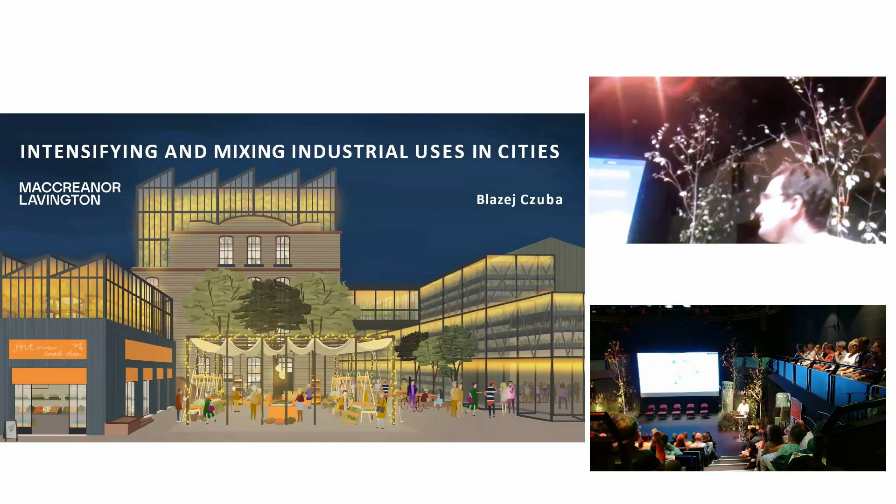You may think of Maccreanor Lavington as housing designers, and, well, not only housing designers, but we have built thousands of homes, largely in London, but mostly in cities in the last 20 years. All of them have been built on brownfield sites, and it's fair to say that brownfield is not a field. A lot of that has had an alternative use. A lot of that in cities was formerly industrial.

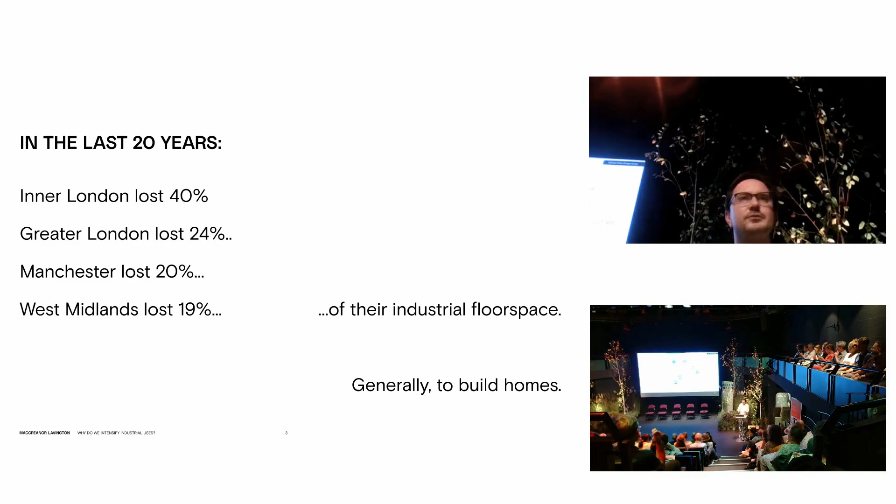The consequence of this is that in the last 20 years, Inner London lost 40%, Greater London lost 24%, Manchester lost 20% of the industrial floor space. As a consequence of a huge amount of industrial floor space being lost in the last 20 years, there has been a lot of pressure on the industrial land. Land values have increased, but also the square meter costs have increased for the individual businesses. So the businesses have had to adapt substantially. They have shrunk, they have fewer floor space requirements, and digitization, automation have also impacted that quite a lot.

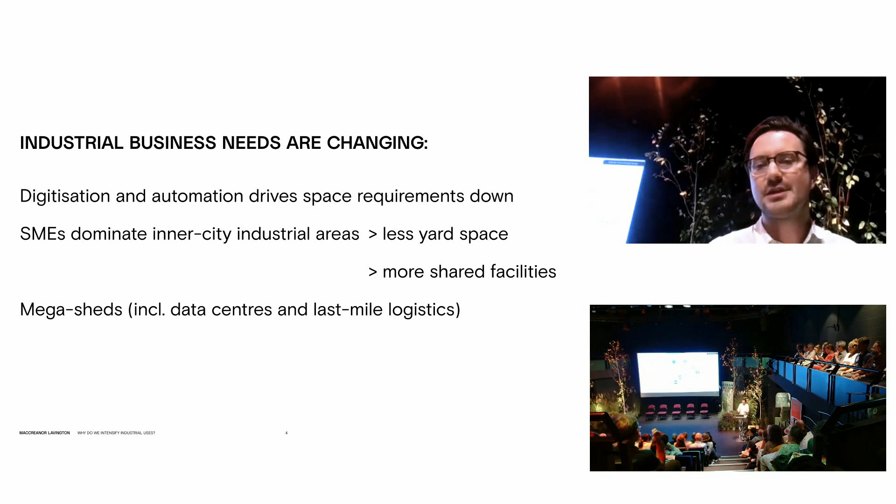But the ecology of particularly inner city industrial areas has dramatically changed. They don't need massive yard spaces, they don't need lots of operational space, but they do need more shared facilities, and actually they do need to be in locations that have amenities and have different qualities. The reality is that all of this has also coincided with the creation of a typology of mega sheds that hold data centers, last mile logistics, the kind of buildings that dwarf the Edwardian mills or granaries of Liverpool and the likes.

And altogether, that has led to quite a substantial change in the actual ecology of industrial land, where general manufacturing, distribution, all those things, they do coexist with plenty other uses, including film studios, but also including policy or not policy compliant yoga studios, gyms, churches, maker spaces. So there's a huge, very complex, very fragile ecology. Ecology that is undergoing a huge amount of pressure because of all of the things that are happening around it and the fact that businesses are desperate for space and that space is continuously shrinking by virtue of more and more developers wanting to build on industrial land.

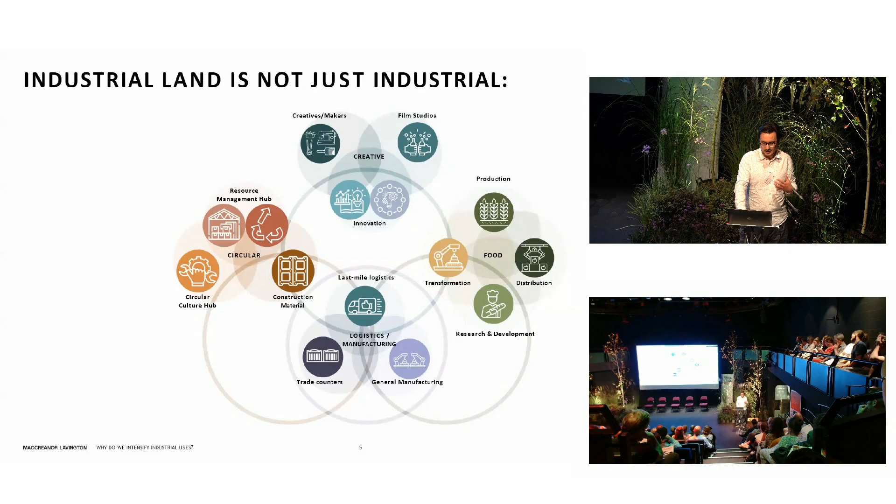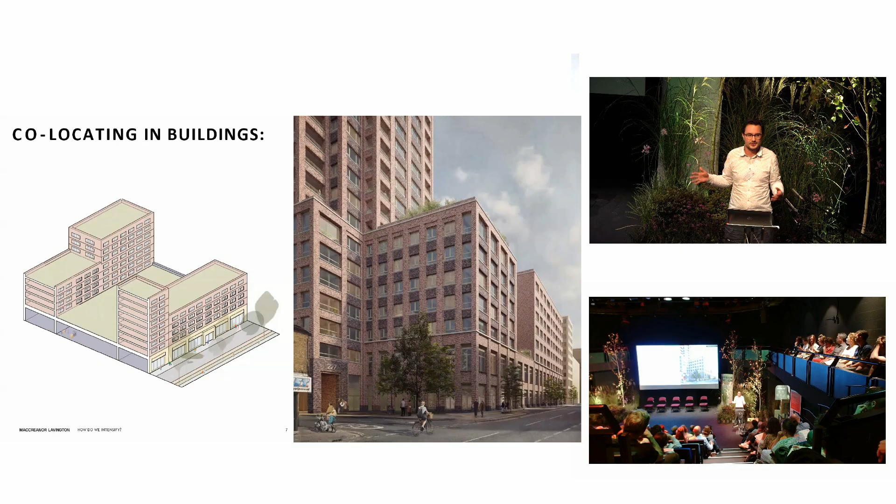The reason for this is that if any of you has ever lived right next to an MOT garage or an Amazon distribution center, it's not fun. They're not very good neighbors, and they're quite aware of that. So they will not want residential neighbors right next to them because there may be 1 or 2 complaints. So the reality is we're yet to see how successful this building is, but we know that it is not necessarily going to be the distribution yards that originally it was intended to. It's going to be something very different. But then there's a massive question of how do you accommodate the kind of industrial uses that the entirety of every city absolutely depends on. We do want our Amazon and we do want our Ocado being delivered on time.

So a lot of the business development work has moved away from what is called horizontal co-location to vertical co-location, which effectively means stacking, which is a fantastic way of effectively multiplying the amount of floor space you have available. But it comes at an enormous financial cost, enormous embodied carbon cost, and quite a substantial operational carbon cost. It can often enough demand a massive ramp that takes HGVs up to a different level. Equally, as with this example, it can operate on the basis of goods lifts, but again, not every single business is willing to accept that. And it costs quite a bit of money.

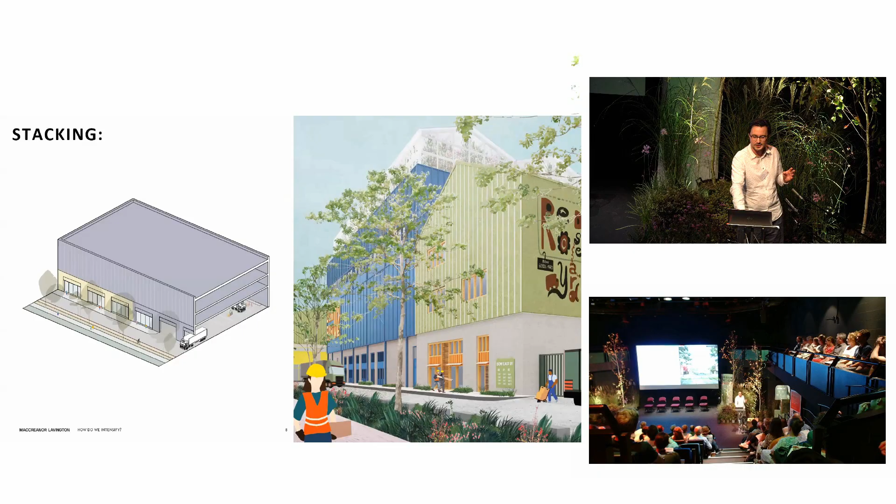So if 5 years ago something like this was perfectly viable and developers were desperate to build more and more of those across London, they don't do it these days. They probably will do it in 5 years' time. But as is often the case, challenges of viability and austerity lead to looking at the tried and tested and changing that quite substantially. So there's a huge amount of work that can be done to the kind of standard single-story shed that you see all around Slough, Hemel Hempstead and the likes, by making that work a little bit harder, by optimizing the yards, putting mezzanines above spaces that you can put above them, trying to get rid of any space left over after planning.

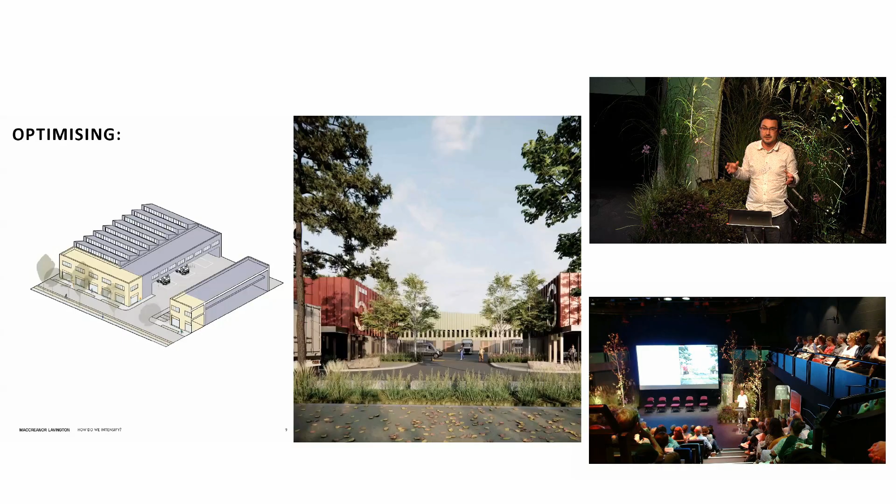It just so happens that there's a huge amount of space left after planning in any industrial estate, because that land often enough is cheap enough to do it, and there's a perception in the industry that an industrial shed has to be an industrial shed, and there's zero capacity for change in the formula. Well, we ourselves don't believe in that.

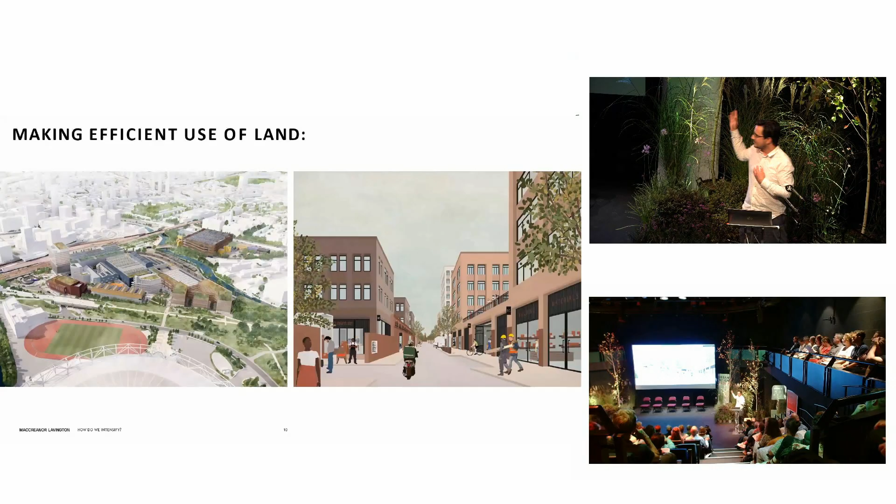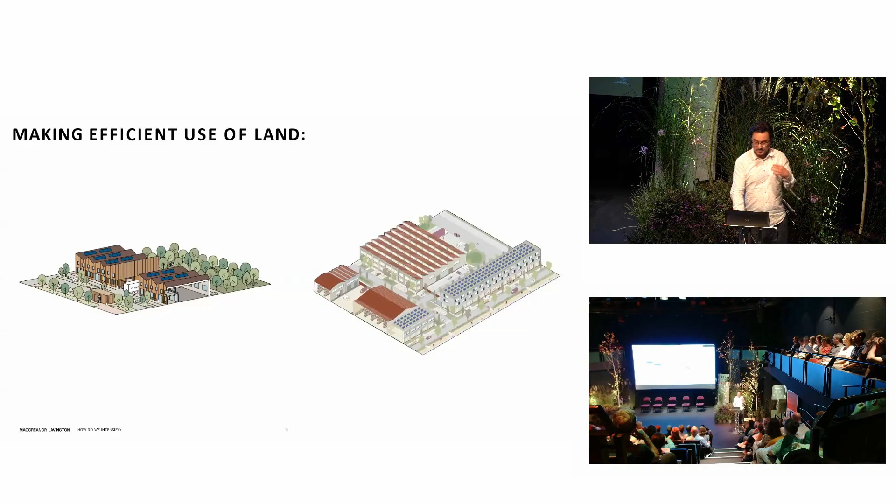We believe that you can make an efficient use of land within an industrial area. You can do it in a city, so you can do it in pretty much central London. You can do it in Inner Birkenhead, but equally you can apply a very similar approach and very similar ethos to, let's say, rural Sussex or the outskirts somewhere out in the Wirral. Fundamentally, it comes down to an ethos which is of not looking at an industrial estate, but seeing an industrial area as a piece of a city.

And as a case study, I want to talk about Bow Goods Yard, which is a project that we have spent the last couple of years working on for Network Rail in London. It may not seem that way, but it is a critical use to London. It is one of the few remaining railheads in inner London. It brings in about a dozen trains every day that carry aggregates, carry construction materials. They take construction spoil away from inner London to areas that perhaps we shouldn't take them to, but they do.

It does have a couple of concrete batching plants that are the most valuable piece of concrete batching real estate in the world, largely because the City of London depends on these two concrete batching plants, because they are the closest you can get to the City of London.

The challenge is that Bow Goods Yard also happens to sit right in the middle of the country's largest regeneration project. We have a beautiful view of the London Stadium from one of those aggregate heaps. We can see UCL East, we can see Stratford Waterfront, and on all sides we're surrounded by either existing or future residential communities. How the hell can you be asking anybody to build 1 million square feet of industrial floor space, intensifying the heavy industrial use and bringing in more trains to this site?

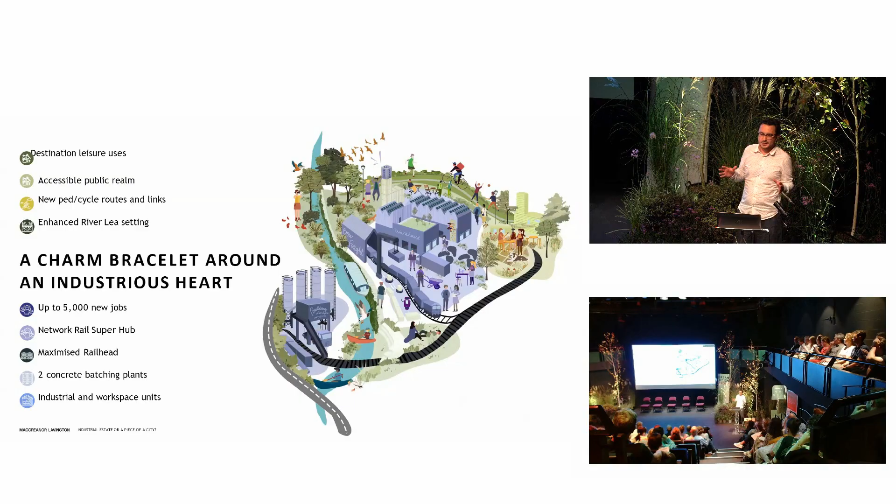The approach we've taken has been around offering something to the community before talking about what happens inside it. So we've developed a vision of a charm bracelet, which is offering uses and offering the spaces for the communities. The reality of industrial areas is that there's plenty of other uses in there that nobody talks about that are very comfortable together. Destination leisure uses, something that cities very much need, but the kind of uses that are not comfortable sitting next to residential uses, but they can be very comfortable sitting next to the kind of industrial use that will benefit from a 24/7 economy and from the footfall, if not directly next to it.

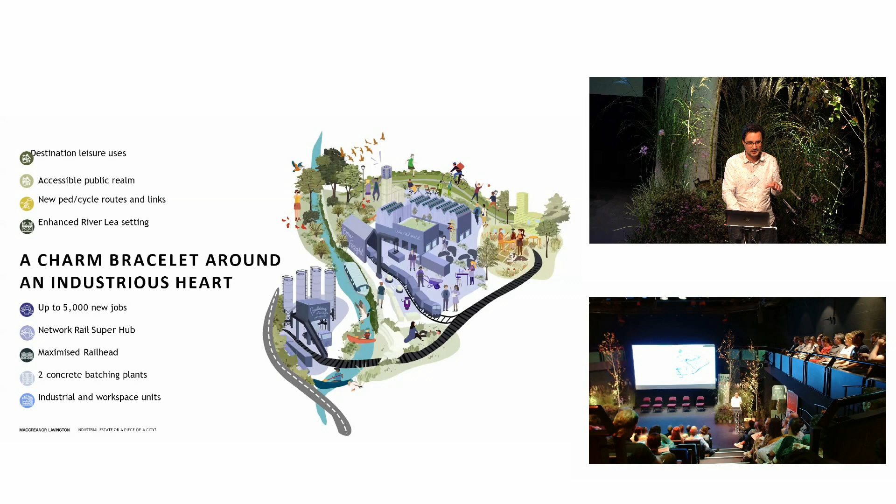And we've looked at plenty of public realm improvements, improving the pedestrian and cycle routes, and generally enhancing the overall edges around what we call the industrious heart, which is going to provide up to 5,000 new jobs, which is going to provide 1 million square feet of industrial and workspace units. It's going to provide concrete batching. It's going to provide a very, very large number of critical industrial uses to London that you would think nobody would want, but we'll come on to that in a minute.

The way we've approached it is by looking at Bow Goods Yard as part of a city, and therefore trying to design a piece of a city. There are certain industrial uses that can very comfortably exist in a city. They actually do benefit from footfall. They do benefit from activity. So these kinds of light industrial and leisure uses can very comfortably sit in a park frontage and define that frontage and activate it. And there's a lot of industry that somehow in the last 200, 300 years has functioned on streets alongside other uses, and it can continue doing that. And this is part of our industrious heart.

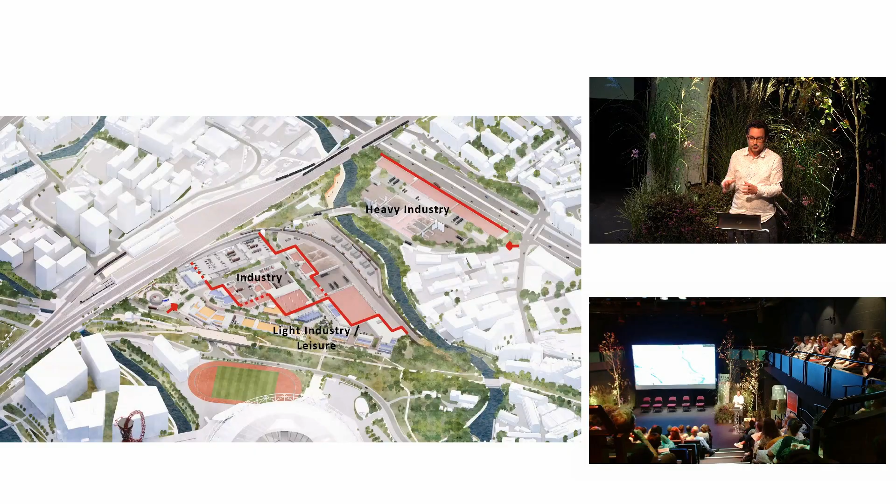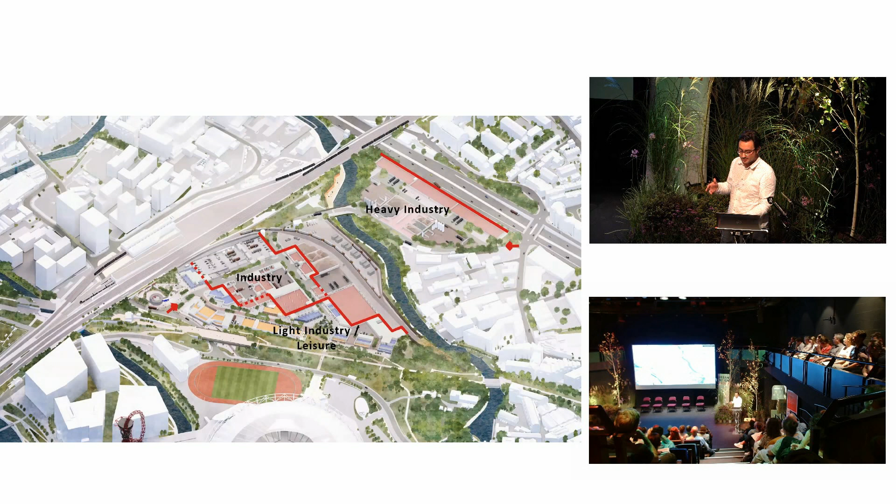But we do accept that there are certain kinds of uses where it may not be appropriate to have a Sunday stroll, because you will be strolling underneath probably an aggregate conveyor belt and going past quite a lot of concrete batchers, which is this heavy industry that has to have a place in the city. It has to have a place in the middle of it so that it is a sustainable location. But it is not necessarily something that is very comfortable to live next to.

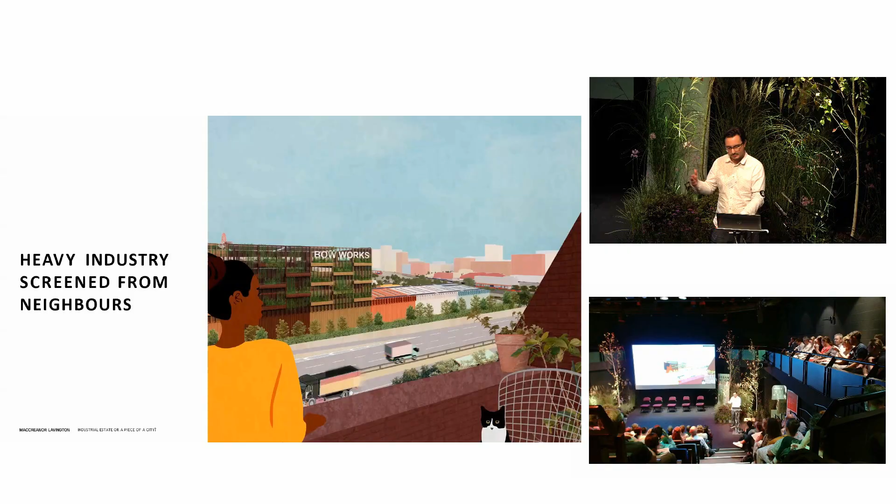But if you don't hear it, if you don't see it, and if you don't smell it, it can actually be a perfectly reasonable residential neighbor, which is what we've been working quite hard on with the various industries that will be operating in that area, boxing out and screening so that it is not something that they see and not something that they can access.

But they can access plenty of other places where effectively the workspaces and the big last mile distribution centers actually form part of a street, because they will have workers, they will have visitors, they will have cargo bike couriers that will have to cycle up and down that route in the massive heat, and they will benefit from trees, they will benefit from sustainable drainage, and they will benefit from clarity of the address and clarity of how to get into the buildings, even if there will be HGVs nearby, even if the yards themselves will be filled with HGVs.

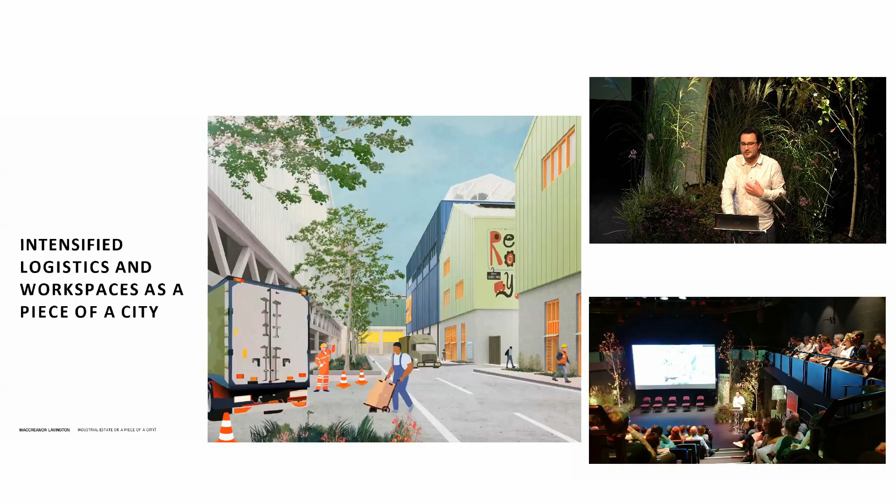And there will be some other locations where light industry will very comfortably coexist with different uses, where actually a carpenter or a gin distillery or a bakery will benefit from having a proper shop front somewhere further down, and where actually having access to a really nice brewery will benefit the climbing centre nearby, although we're not recommending that anybody should drink a beer before going climbing.

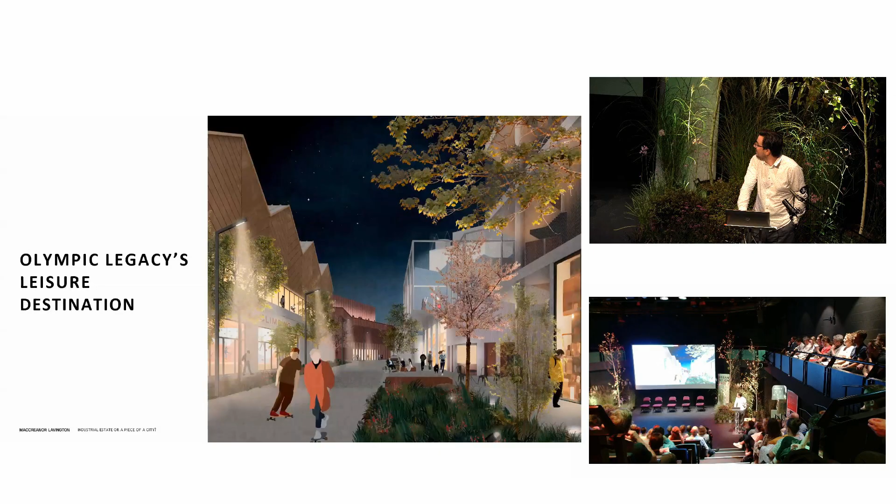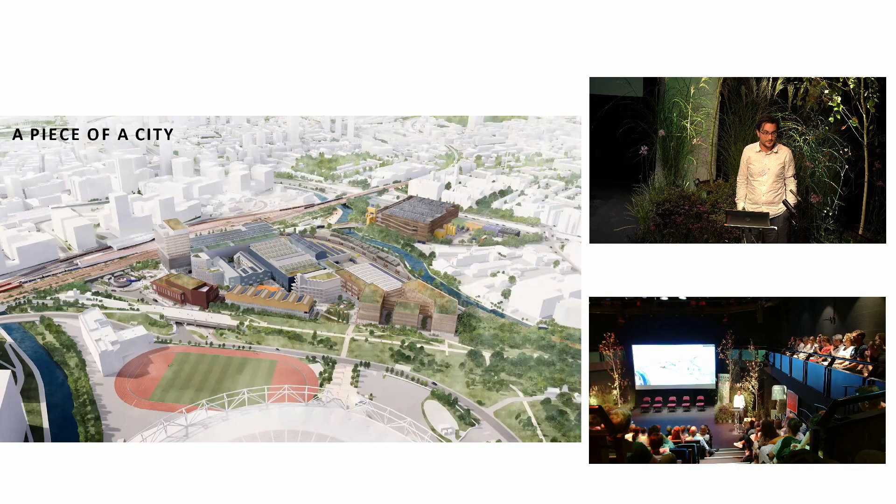But ultimately, these are the kind of uses, industrial or not, that can very comfortably coexist with a metropolitan, international importance Elizabeth Olympic Park and helping frame the setting to the London Stadium. And ultimately, we see it as something that is a piece of the city. And by virtue of being a city, it's fine for it to mix all kinds of different uses, which is what cities have been doing for the last 200, 300, 500 years, with the most civic uses being right next to the most dirty uses.

And it is a fundamental part of our vision for this project, which is going beyond being simply sustainable, which is effectively do less harm, because we have to think about how we design to be regenerative and fixing what the previous generations may have gone wrong. And industrial uses have this massive potential to be regenerative because, for example, if you have a railhead, you can remove 90,000 HGV movements per annum, massively cleaning up London's air, reducing road congestion.

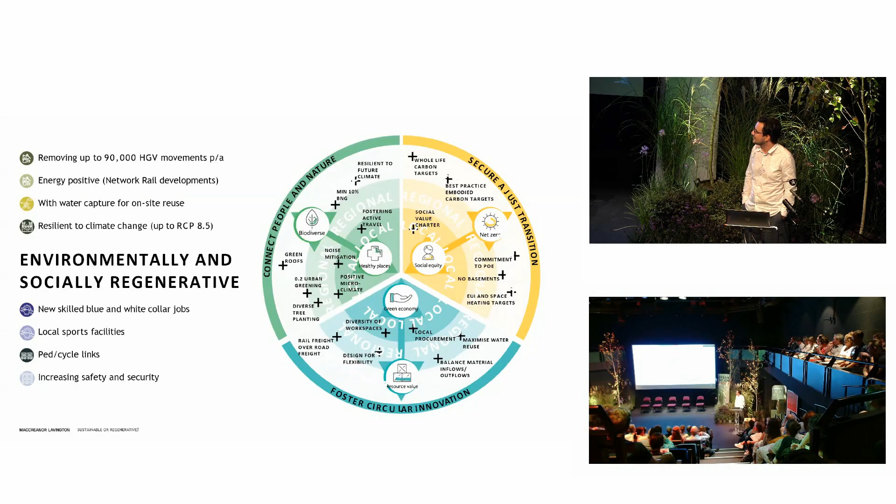You have, and Bruce has presented also in his schemes, a lot of roofs that can have a lot of PVs that can, in case of this development, produce enough energy to provide electricity for over 1,000 homes per annum. You can keep all of the water on site so that you can actually use water captured on site for concrete batching rather than using it off the water mains, and plenty of other environmental aspects alongside social regenerative.

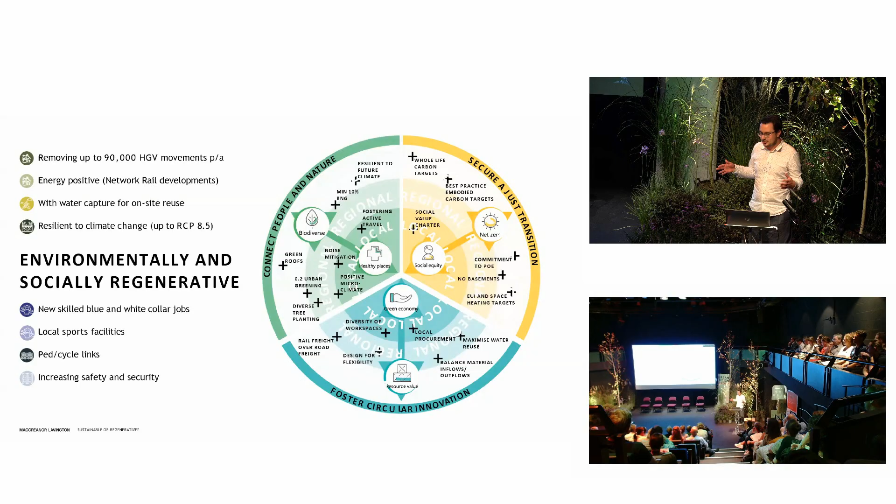If you think of London legacy, you think of shiny, beautiful office buildings. But there are very few jobs that are skilled, blue-collar jobs that are actually what the local communities are requiring. So actually by providing these kinds of jobs and occasionally mixing the white-collar stuff and blue-collar stuff, which in case of Network Rail has been quite a challenge, it can be social regenerative in terms of enabling a very different kind of lifestyle that supports people living locally, alongside local sports facilities, and much better, much safer cycle routes. So it's not just about embodied carbon, it's not just about operational carbon, it is about lifestyle carbon as much.

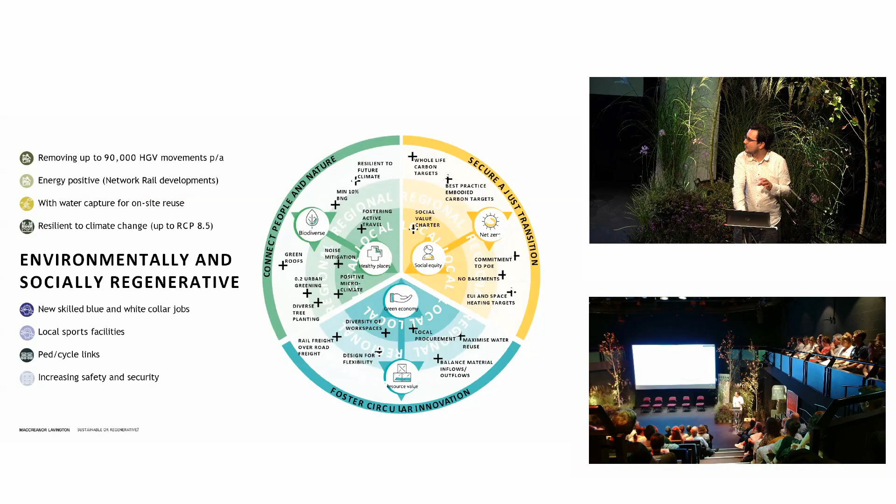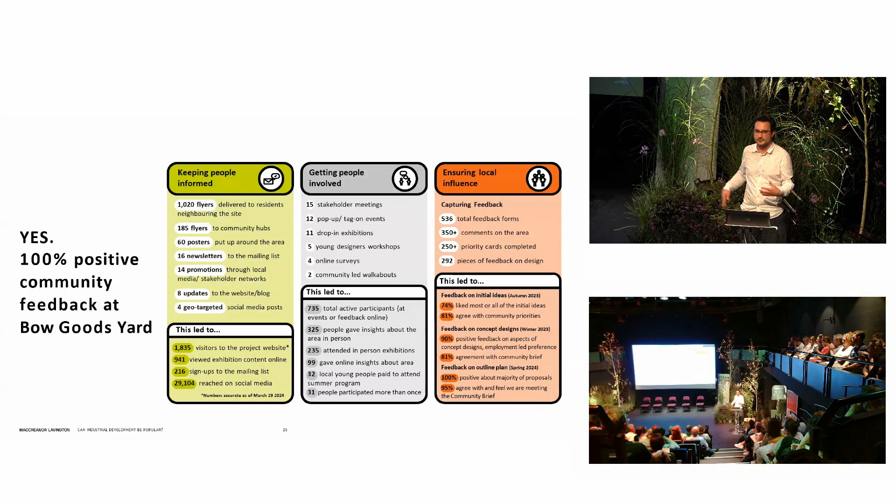We achieved 100% positive community feedback just before planning submission. We are 4 weeks away from hopefully a planning consent. We've not had a single negative community feedback on the website so far. And we're not talking about 2 feedback forms, we're talking about 735 active participants and 500 plus feedback forms received, and all of them positive because we've taken the communities together on a journey explaining the value of industrial uses, explaining why they have to be there, and explaining what else can be offered in exchange for them accepting the reality of cities needing a place to have Amazon deliveries, among many, many others.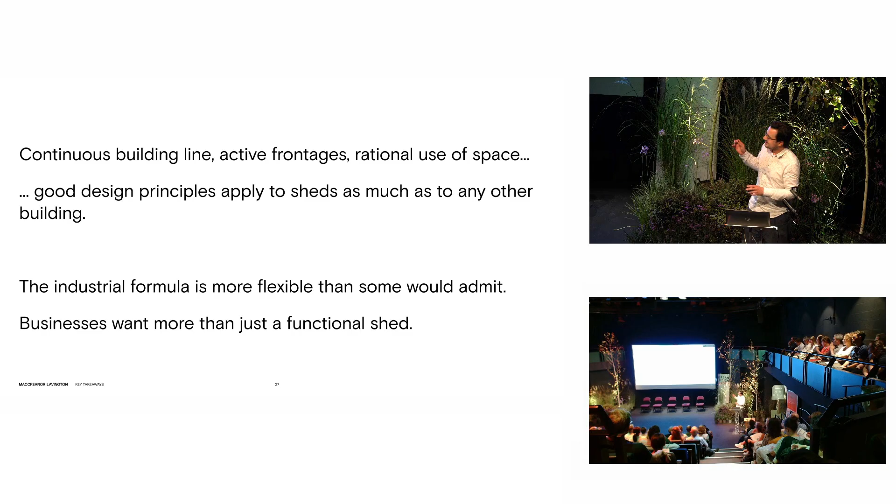So the key takeaways, I think for me the key takeaway is industrial uses are a piece of a city. The moment you start thinking about designing sheds as effectively buildings in a city, you apply the same kind of sensible design 101 principles that you can't necessarily see here, but the kind of principles around active frontage, rational use of space, good building lines, the very, very basics. You can do the very same thing with an industrial building the same way you apply to any other building. And suddenly you can have streets as opposed to dual carriageways with roundabouts on either end.

And the reality is, and we have worked with UMC ourselves on the Bow Goods Yard, the industrial formula is much more flexible than some would admit it. And we've done quite a bit of soft market testing alongside Network Rail on this project, and the big players in the industry, some of them were less happy than others, but all of them generally accepted that they will take on space in this location because ultimately businesses want more than just a functional shed.

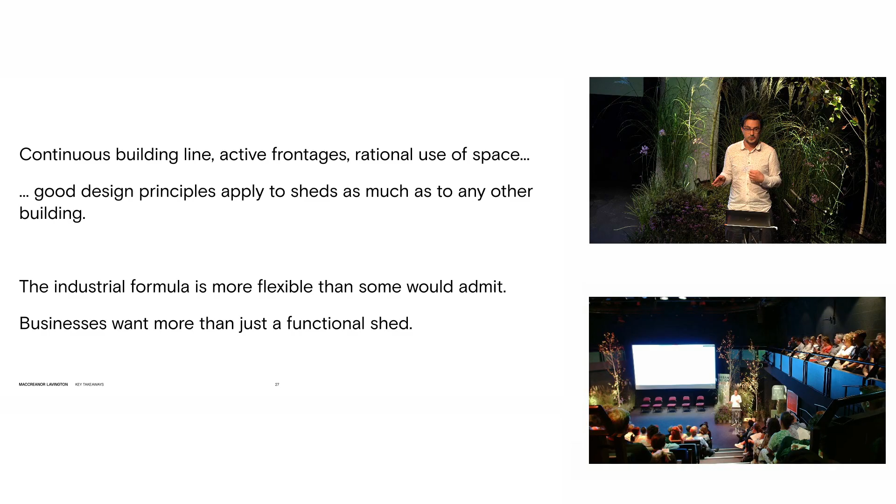What they do want is actually a proper lifestyle that they can offer to their clients and most fundamentally to their staff. They can attract staff that will be working in good locations, and equally they can be retaining that staff because they will have something else to offer, which is a good building and a good piece of a city. Thank you.